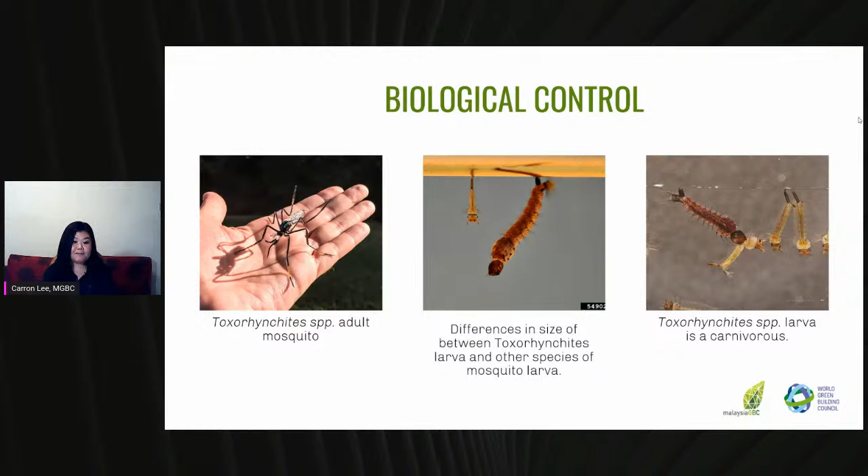I'm not sure how many of you have heard of Toxorhynchites species. This is a giant mosquito which you can hardly see. Normally they appear in the forest, and they are the biggest size among all mosquito species. Picture number 2 shows the differences in size between Toxorhynchites larva and other species of mosquito larva, like Tom and Jerry.

The small larva is what you normally see in stagnant water - those are the normal species of mosquito larva. Whereas on the right is the giant one, definitely because the adult is already a giant mosquito. So that is Toxorhynchites larva, and that's the size of it.

And the third picture - can you see? Toxorhynchites species larva is actually carnivorous. They bite those small larvas. So if the small larvas are Aedes larva, they are actually doing biological control - helping us suppress the population of Aedes. Isn't that good? This is what you call biological control.

I left out one point - even though Toxorhynchites species mosquito is very big, a giant mosquito, the good thing is the adult is not a blood sucker. So you don't have to worry they will suck your blood. They don't feed on blood. What do they feed on? They feed on plant sap. That's the good thing about Toxorhynchites.

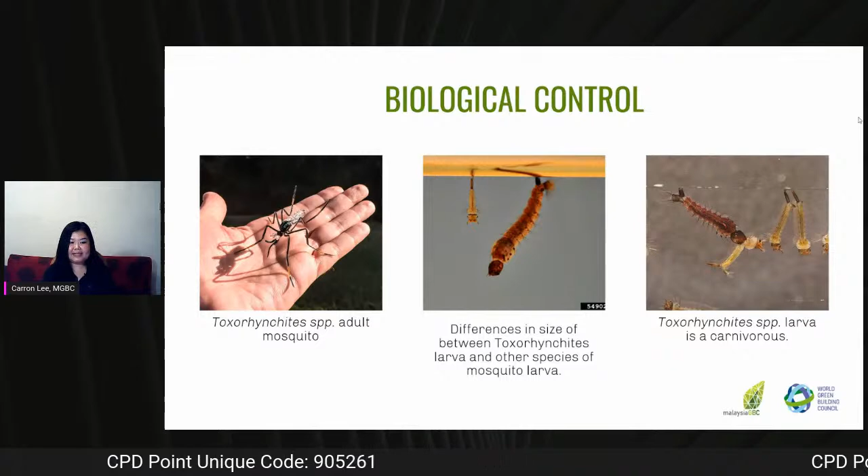From now on, let us focus on physical control through green design. Why is it important? Because the architect is very important. You design the building, and your design doesn't just give a positive impact to the green building environment, but to pest prevention as well. If you understand all the points from a pest perspective, you are helping the environment, helping the world to suppress insect infestation. You do pest prevention by design - you are designing pests out of structures.

Benefits of pest preventive techniques at the design stage. During the design stage, it is always good to bring in an entomologist to be on board so they can run analysis and inform the architect of the perspectives you need to look into. Simple design features can reduce long-term pest control costs in buildings and landscapes. This is definitely true. By the end of this presentation, you'll understand how we can work together to help building owners reduce long-term pest control costs, especially for termites.

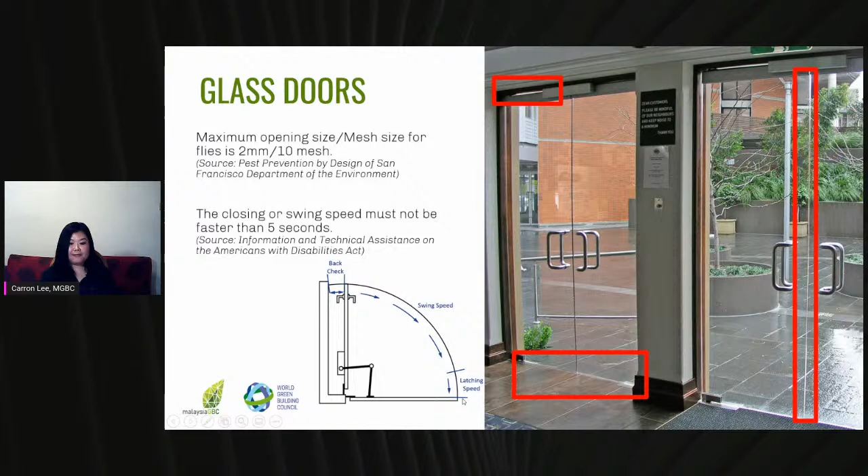Air curtain. If that area has been identified as heavily infested with flies, and you know you cannot afford to allow flies to go in, other than designing the doors, you might increase air curtain specs for heavy traffic—an air curtain at the entrance door.

I'm going to show you this video. I'm not promoting the brand, I just chose it randomly from YouTube, which I think is something I'd like to show with everyone. Please focus on how they repel the flies.

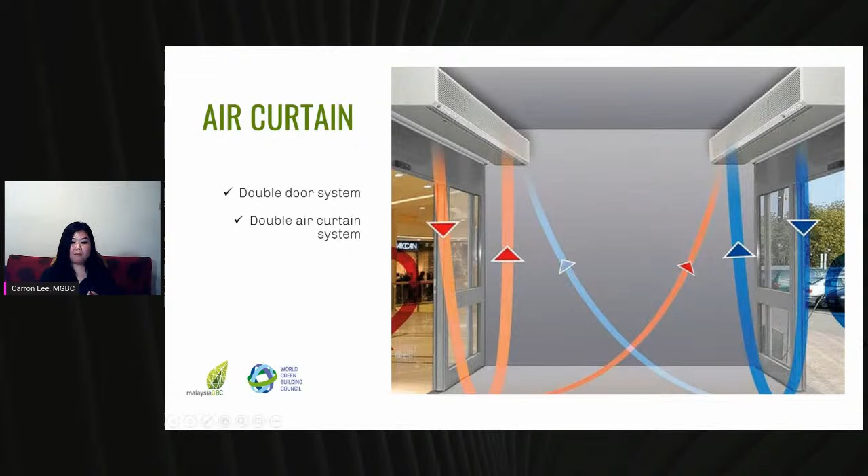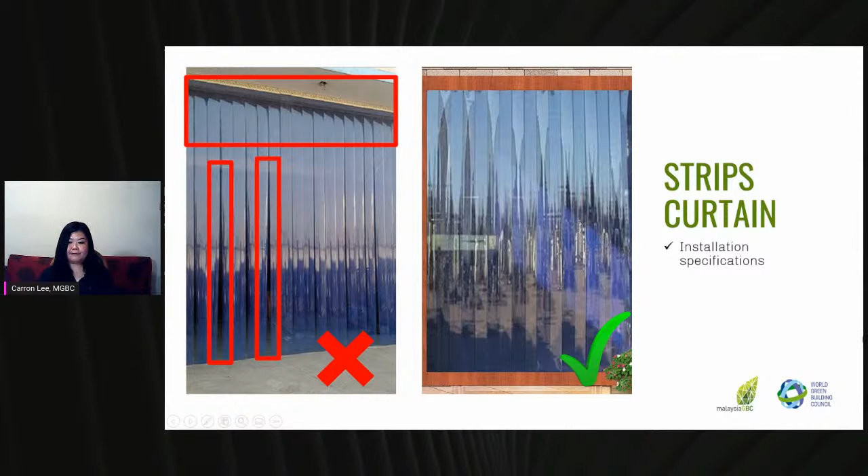Case study. Let me share with you some case study—this is what I experienced. LCCT budget airport, many years ago, everyone went to LCCT budget airport. My experience was that the F&B outlets were all open concept. Maybe it's because it's a budget airport, but they faced a very serious issue, which is fly infestation. Their food had a great smell, which attracted a lot of flies to the F&B outlets.

So I went there to conduct the treatment every day, and I spent weeks there to study the flies' behavior, and I told them you cannot get rid of it. The F&B outlet there is running 24 hours, 7 days a week, and it's open concept - meaning no glass, nothing. I told them you need to install glass panels, a proper entrance door, maybe a glass door, so that we can stop the flies from outside coming into the F&B dining area.

So the client went and installed it. But still, I noticed it's still not good enough, to be honest. Even though they built up the panels and everything already, the flies can still come in. It shows that the infestation there is very serious. But of course, after they put up the glass panel and the glass door, the infestation has cut down.

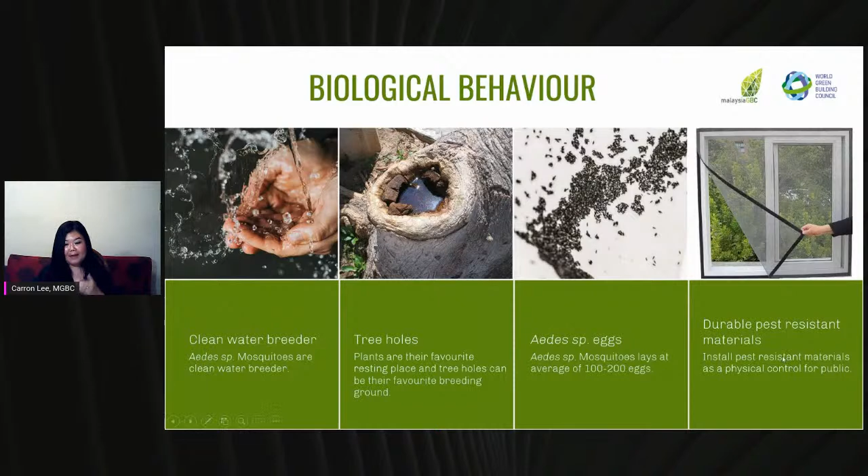What I really try to highlight in the analysis report is that I need a gadget to collect mosquitoes, and from there we identify the type of species of Aedes. If that area is proven to have Aedes, then that is already a trigger - that area is a red zone for dengue outbreak. So from there, you have to come up with the specs, or go for durable, pest-resistant materials.

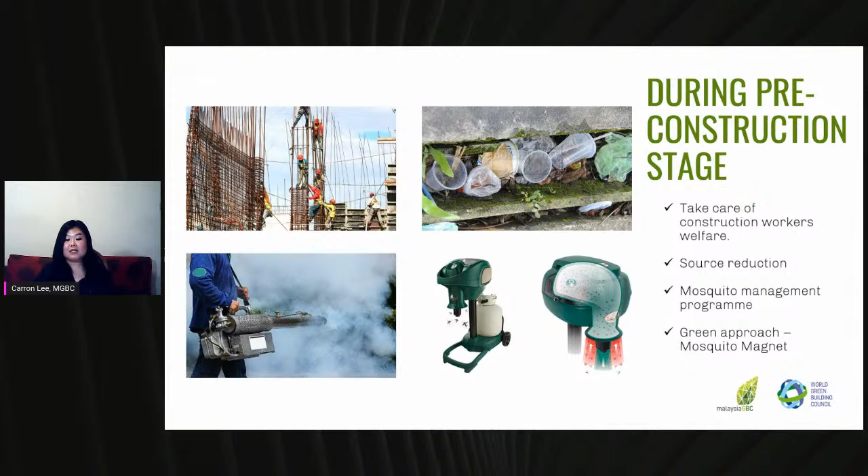During the pre-construction stage, when you talk about mosquitoes, of course you have to take care of the construction workers' welfare, because if one of your workers is infected with dengue, the authority will come after you. So why actually will the construction area become a breeding ground for Aedes? Mainly it's because of this - all these are potential areas for Aedes.

The cleanliness of the site, you have to look into it. And of course, you must have a mosquito management program, which normally you have, and plus, this is the mosquito management.

This is actually a green approach, which does not use chemicals. It mimics humans, releasing CO2, and then all the female mosquitoes, only female mosquitoes suck blood, will go into this gadget and they lock it up. So from here, I will be able to see and identify what type of species you are having at that area.

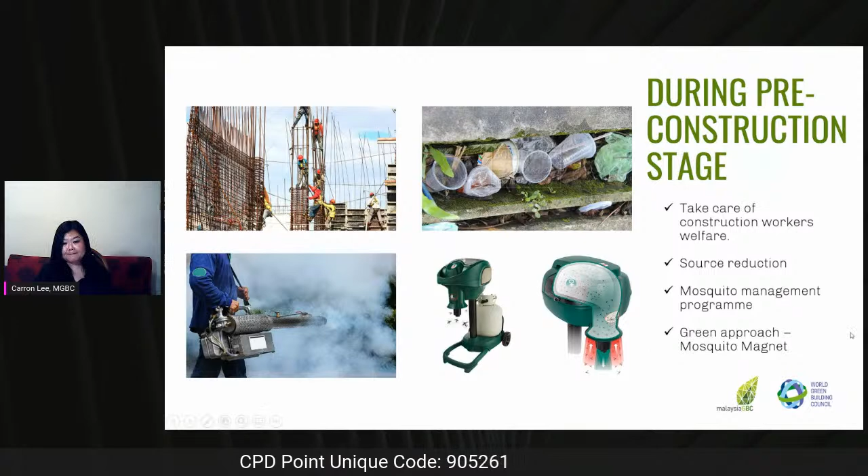If let's say that area is heavily infested with Aedes mosquitoes, what shall you do? Let us look into rain gutters. Each and every pest, each and every insect, there are a lot of points, but I just choose a few in this presentation. So rain gutters is the one where I normally see a lot of mosquito larvae staying.

In Malaysia, if you see, we like to expose the rain gutters without any screen. So that is our Malaysian culture. For what purpose? I'm not sure. Perhaps it's the cost issue of the construction, or perhaps they feel there's no need to put any wire mesh or screen to cover the gutters. But if you want a green approach for mosquitoes, this is very important.

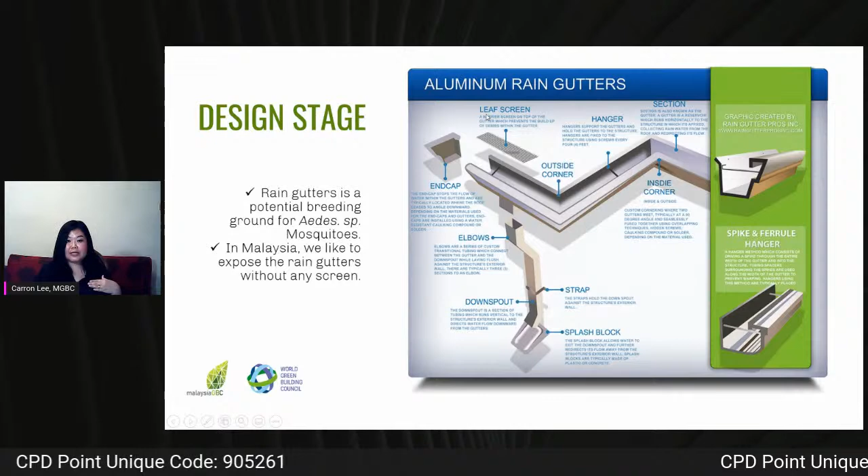We are not looking into leaf screen, I'm looking at mosquito screen. Why is it very important?

This data is extracted from WHO, the latest one. In year 2020, as of 11 July 2020, the total reported cases of dengue is 58,645. Is it very, very high? Absolutely yes. If you compare with COVID-19, everyone is talking about COVID-19 - COVID-19 in Malaysia, just now I checked, is about 10,000 plus.

To us this is a very serious case. But how about dengue? What I want to tell you is dengue actually is very important in Malaysia.

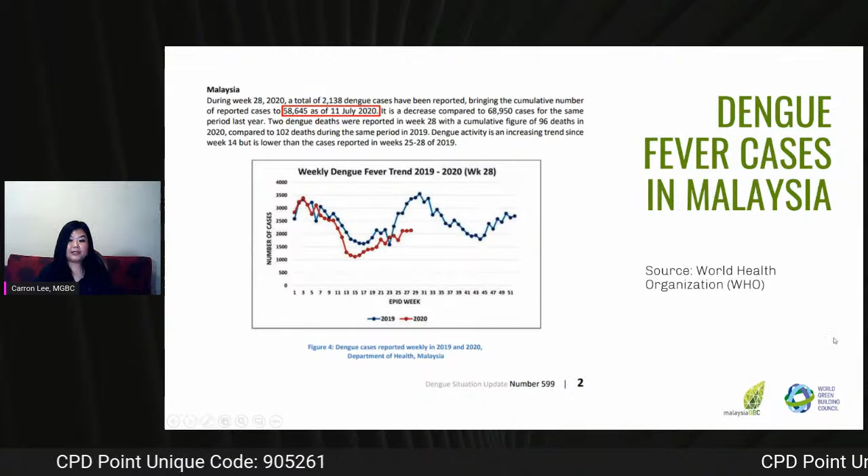Back to the rain gutter. Instead of just exposing the rain gutter, how about we use a rain diverter to divert the rainwater directly to the downspout? Is it workable? Second thing is, if not workable, and you must have a rain gutter, why not put a mosquito screen? The mesh size has to be no more than 1 millimeter.

And this is not just a figure from the sky, it's data from the San Francisco department. If you talk about green approach, it might be new in Malaysia for pest management, but it is not new overseas.

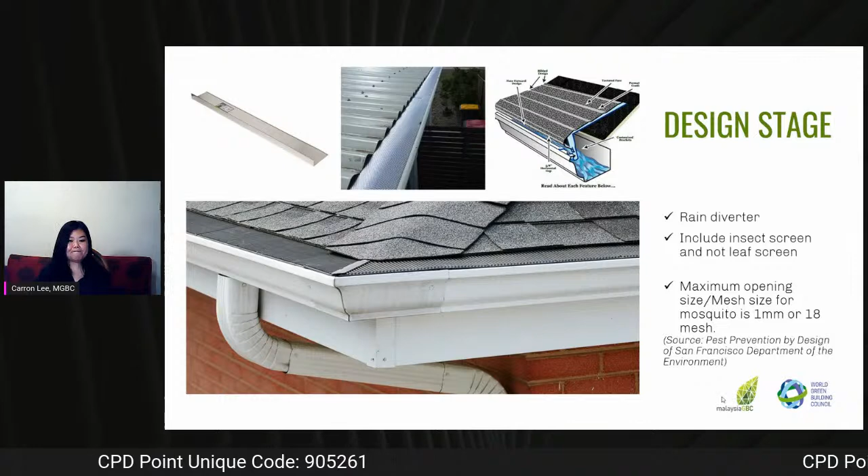Like this one, they are just focusing on leaves, but this design is not ideal if you talk about mosquito management. The mosquito can still fly in, and you have clean water stagnant there, and they can lay eggs, and you have the population again.

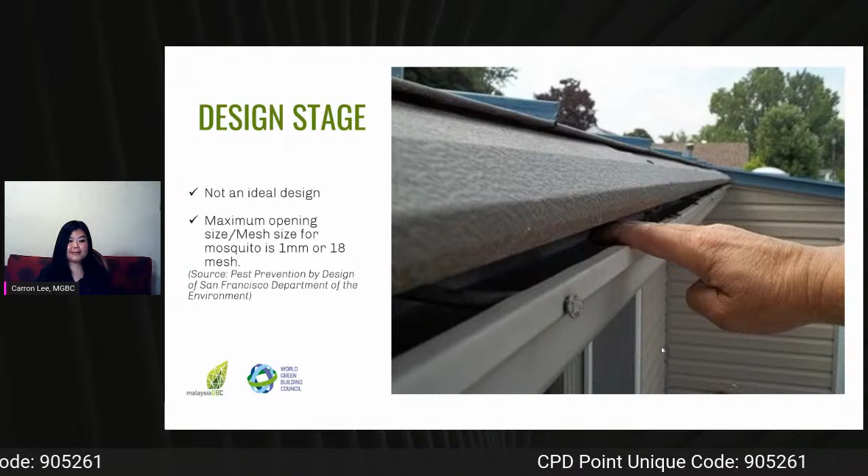When you have this sort of design for rainwater, why waste the rainwater? If you talk about green building, from there, why not move into a rainwater harvesting system as well? So this is a very good approach, but my concern will be the gutter with screen on top - it has to be under mosquito specs.

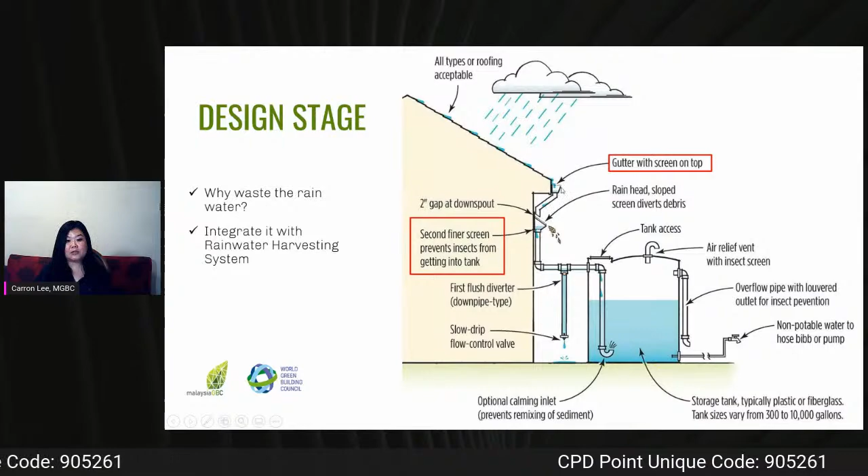Commissioning stage is very important for us to go in and ensure all potholes at the external surrounding are closed, because later I'll show you my story.

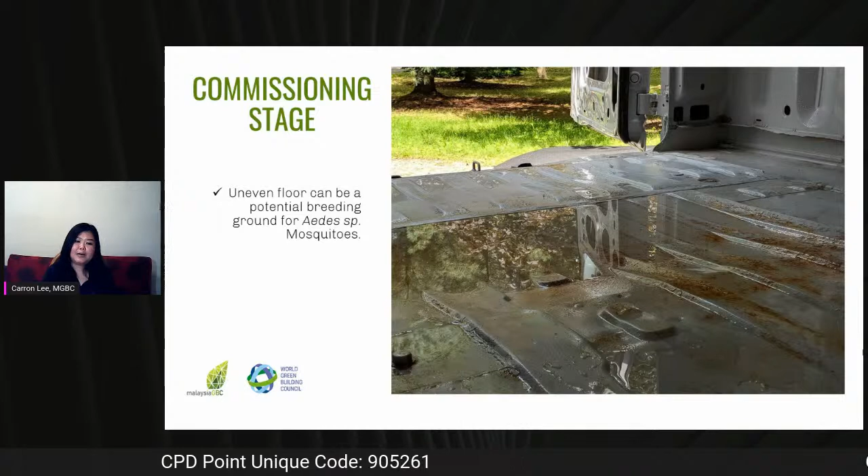Like this, uneven floor also will be my main concern. Every time I go to an area, if there's uneven floor and I can see a pool of water there, it is actually a potential breeding ground for Aedes species.

Let me share with you a case study factory. This one happened many years ago in Petaling Jaya. So they called me in, and I will not forget that round of inspection, because that factory was heavily infested with Aedes mosquitoes.

Why they called us in is because MOH, the authority, went after them, and they confirmed that the larva is mosquito. So it's a hot zone for dengue outbreak.

And this factory actually does not manufacture anything. They just use the factory as a storeroom, a warehouse. It's a very well-known company - I will not tell you what company that is. So they actually store all the sanitary fittings, and even though the warehouse is so big, they don't have enough space.

They even put the sanitary fittings like toilet bowls, sinks, everything at the external perimeter of the building, so that when rain comes, you actually collect water. Just like a toilet bowl, it collects water.

Second thing is, when I walked in, the road was not nicely done. You have a lot of potholes everywhere, and I was very surprised.

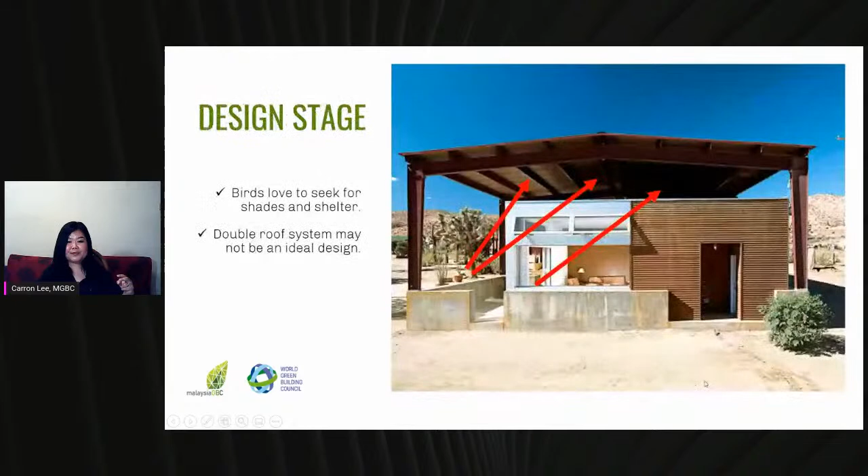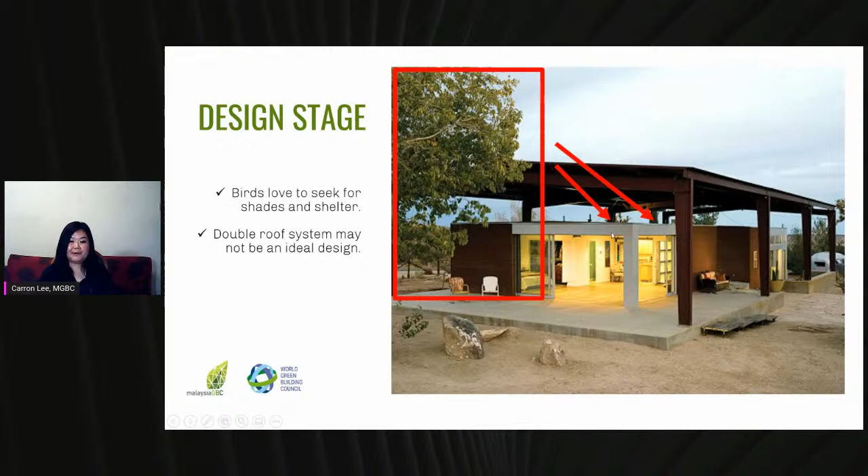Second thing is they will also hang around here. To do an inspection or investigation of birds, you actually have to see the timing. Normally, towards the evening time, when you have a lot of shades, you will know where the hotspot area of their hanging place is. Like this design also, you see, there's a tree here. So the birds can be hanging around here, can be hanging around here. So it's not really an ideal idea to have a double roof system.

This one as well, especially for factory. If, let's say, you build a factory, you must understand what type of factory you are going to build. If, let's say, it's a food factory, there are a lot more things you have to consider. It's not just building a building, because food factories are very strict. You have to comply with their food certification.

A lot of customers do not know how to inform the designer what issues they are facing, but actually the building plays a very vital role in pest management for a food factory, especially in an area which is heavily infested with birds. It is advisable for you to install metal birdstop. The roof of the factory is actually a corrugated design, so it's always good for you to close the gaps. Otherwise, birds like sparrows can actually fly in. And normally, a factory's ceiling is very high, so it's not easy to get things manageable.

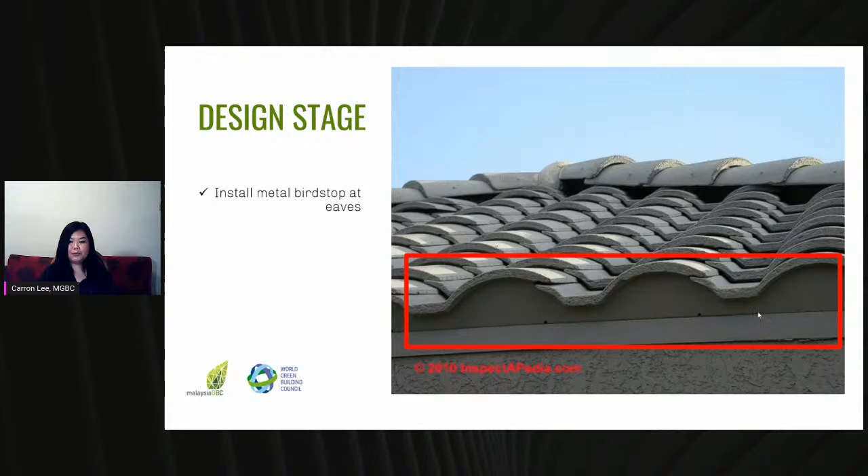Case study of birds. Let me share my case study. Mosque. This client asked me to visit the mosque, and the mosque is very beautiful. So I walk in, and it's very peaceful because it's a holy place. The design of the building is very beautiful. When I look up at the dome, the art is so beautiful. They are facing a birds issue. Why? Because at the entrance of the entire building, there's no door. So it's open 24 hours, because that is what they want. They want the nature. But that area is infested with birds.

And throughout the entire building, they have also installed ultrasonic devices, which repel the birds away. If you want to go in that direction, do not think of buying one or two units to try. You are actually wasting your money. If you want to go for that gadget, the entire building has to be integrated during the construction already. That is what most people are doing, which is very good, I told them. But still, after about a year or two, they say it's not really working, and the birds start to invade the internal area of the mosque.

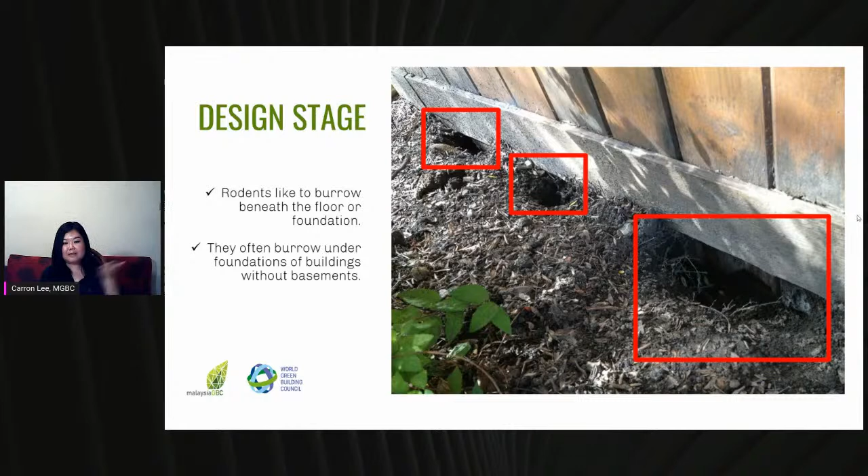And the rats start to go into the building already. And that area is actually very near to their kitchen laboratory, so there is a lot of food. And the rats really burrow like that. Every week I have to spend time counting the burrows. Why do I need to count the burrows? We count the burrows because when the number of burrows keeps decreasing, it means the population starts to reduce.

This is the latest project case study. This is a government building. You see the design of the building. This actually is a slope. It's a landscape. It's a very big landscape, and it's a slope area, and that's why the design of the building is like that. This type of gap, actually the rats can go in.

A big landscape actually can tell you you will be having a very heavy infestation of rats already. Plus, if let's say the design is like this, the rats can go in. And the internal design of that building, the floor, actually they use floorboard. Okay, so the floorboard, that means beneath the floorboard, you have a lot of wiring.

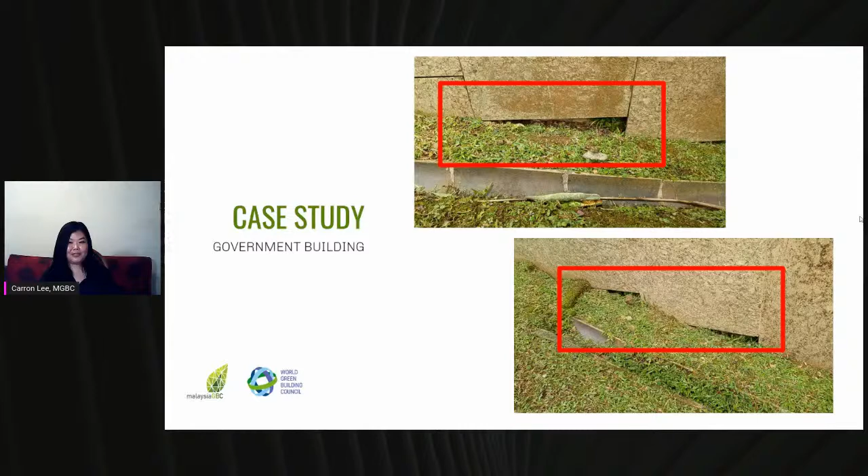So this client is facing a rats infestation issue, and I can tell you the rats actually travel through the wiring system of the building. Okay, quite a very huge building. So what shall you do?

So for rats, it is advisable, if you know that there is a high pressure of rats infestation, to try to construct curtain walls, okay, around and below the foundation. So the material will be concrete. The specification is 2 feet below the surface, 8 inches horizontal L.

That means here, okay, 2 feet minimum. This side to here has to be 2 feet. Here maybe 1 foot. And the thickness of it has to be 4 inches. Why? Because if let's say the rat comes here and burrows, what are you going to do?

The rats will come here and you actually deflect the rats away from invading the internal compound of the building. Without these curtain walls, the rats can just burrow. That is what's going on in Malaysia here. The rats just burrow and they just move in here.

Let's say, just an illustration, okay, this is the floorboard as I mentioned to you earlier. Down here are all the wiring, okay, linked to all the departments of the building. They will follow all this wiring channel, and a very heavy infestation will happen because one mother rat can deliver about 6 to 7 babies per litter. So you just imagine.

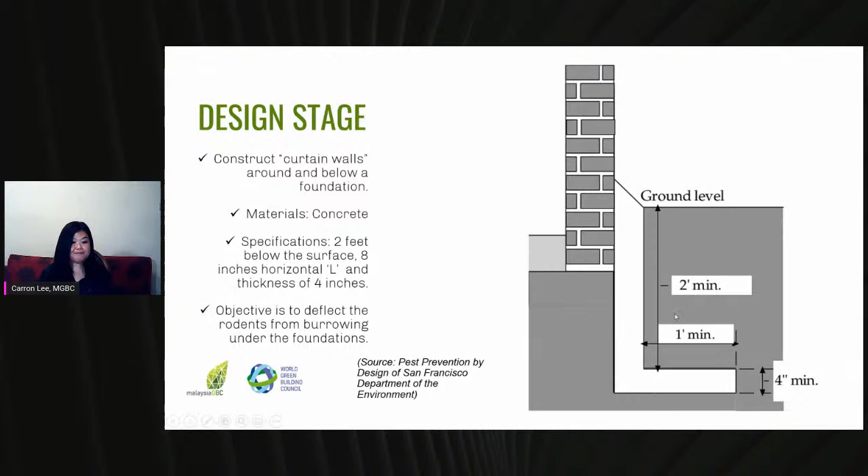Okay, this is also piping. It is very important in order to control or manage the rats infestation. Instead of installing the piping with an open end, I would suggest that the building is installed with flap valves or mesh at the downspout. So that's what you see. And the maximum opening size or mesh size for rodents is a quarter inch. Okay, this is very important.

And this is actually a rain gutter, right? To us this is a rain gutter, but to the rats this is a highway. Okay, no matter how tall your building is, 29 floors, 30 floors, the rats can go from the drainage system on the ground floor straight up to the 29th or 30th floor. It's a highway to them. So it's good that you cover it up with the mesh.

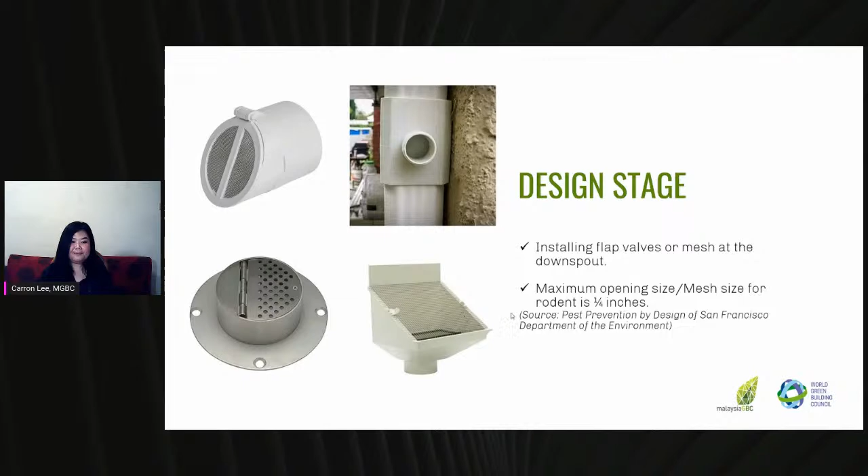Okay, when you talk about rats, there are a lot of case studies. When you talk about rats, I always say it's not about one F&B outlet issue. It's not one building issue. It's actually the entire area. If you want to have a very good rodent management program, you need to get the local council involved. Without their support, we will not be able to suppress the rats infestation in the area. Okay, all commercial buildings will face rat issues. It's just a matter of how heavy the infestation is in that area.

Okay, let's move to termites. I will share with you what are the current treatments available in the market and what is green termite management. Termite soil treatment is nothing new. Every construction, you know you must do soil treatment. So this is how they do soil treatment. They just wet the entire area and spray termiticide at the construction place.

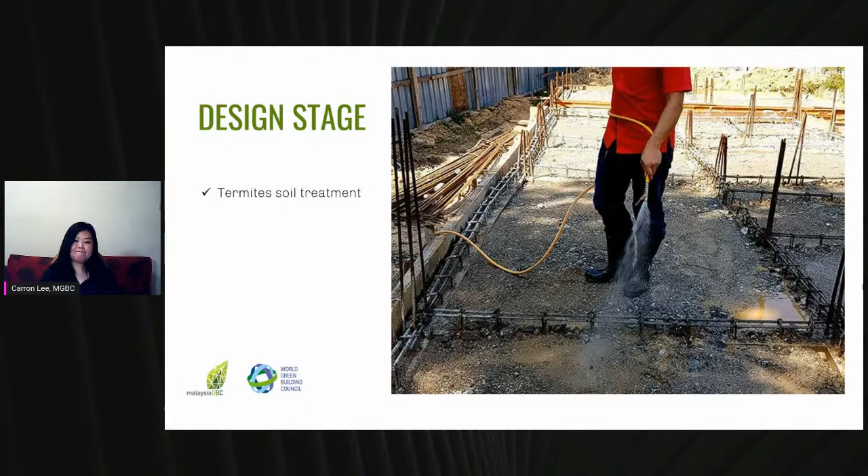But when you go for soil treatment, you also must understand the type of termiticide. Normally at the consulting group, you don't have to know what type of termiticide your contractor or pest control provider is using. But it is always good to go the proper way. What I'm going to share with you is scientific research done by a professor, which no one in the market does. You want soil treatment, people just quote you soil treatment. How much is it? They will use the chemical according to your budget.

But if you talk about termiticides, there are a lot of big manufacturers out there. Every year they spend a lot of money to do research and come up with new technology, and still people will go for the cheapest one. Understand, construction cost is a very critical issue. The cheaper the better. But what is the impact of not knowing the real scenario of soil treatment?

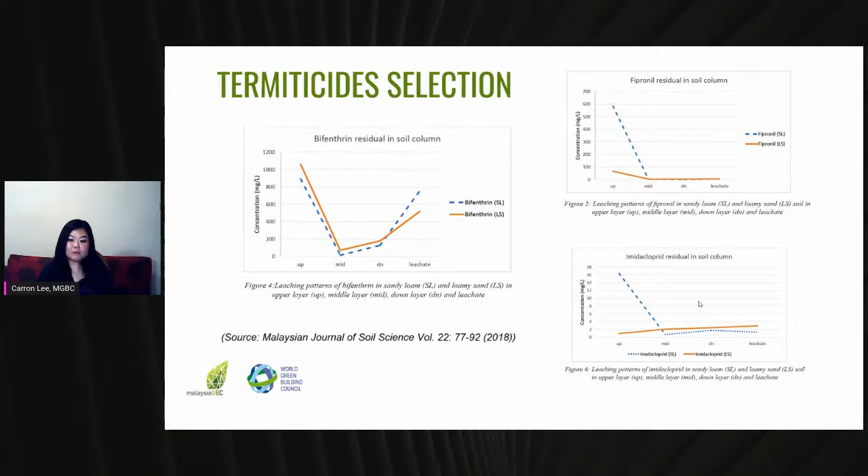Other than chemical, if you want to go for green termite management, overseas they're actually using the wire mesh technique. That means no chemical at all. They put aside the soil treatment method. They just target all the structures which are potentially penetrated by the termites. From there, they apply the wire mesh technique. I'll show you later. But the size of the mesh is very, very important. Maximum opening size of the mesh for termites is 0.6 millimeter only, or 28 mesh.

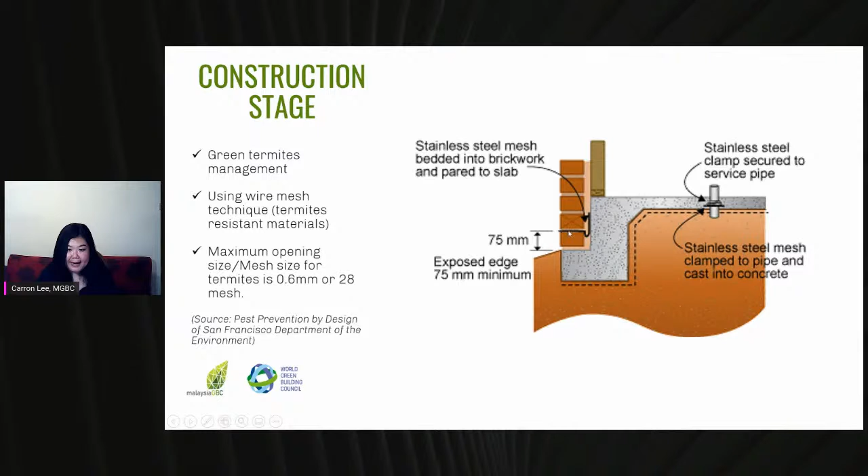During the construction stage, you can see all the piping areas - these are the hotspot areas which termites will penetrate. So you use the wire mesh, you secure it here before you pour your slab. Another one is when you have this type of design, this area is also potential for termites to penetrate. So you also use the stainless steel mesh bedded into brickwork and pared to the slab before you pour all this.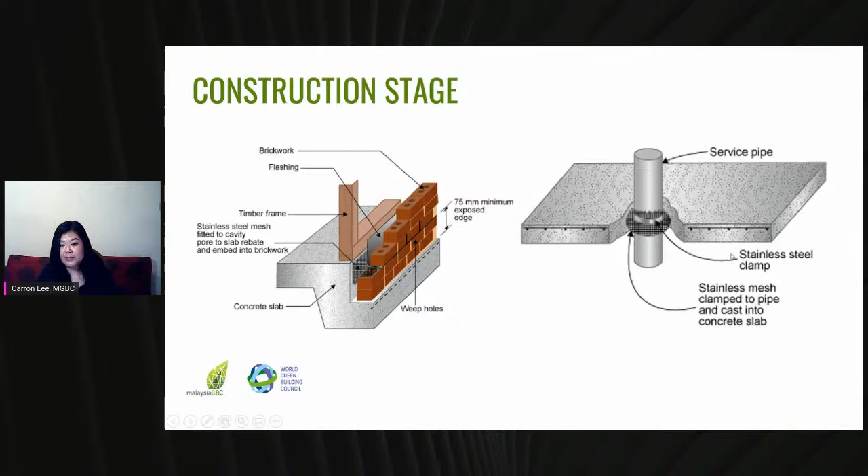Let us see here - this is how you're supposed to lay your wire mesh. This is nothing new in overseas countries like Australia and US, they've been using it many times. They also give points for the green building approach because there's no chemical being used. So this one also, you see the pipe, that's how you put the wire mesh here.

Let me show you this video - this is from the US. I want you to focus on the size of the mesh. This is not just a piece of plastic bag, this is nothing bigger than 0.6 millimeter. Let's enjoy.

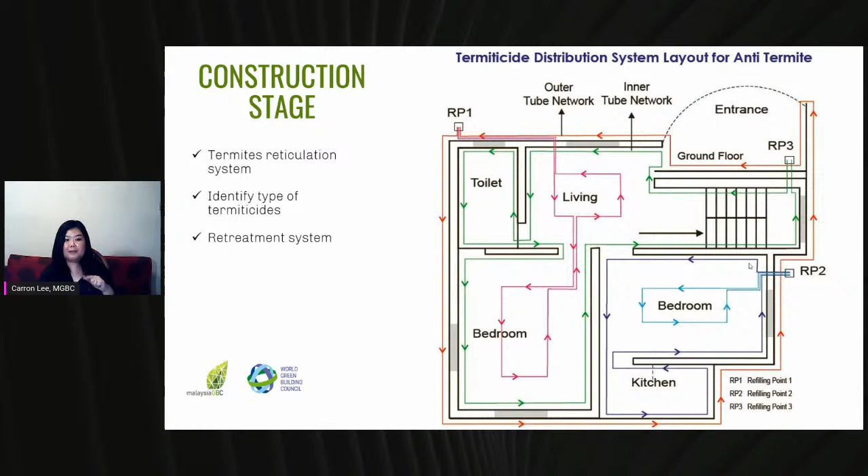The good thing about this system is after 2 years, when the building is up, you can actually open up RP1, RP2, RP3, and pour and reapply. That's why it's written here, retreatment system - reapply, pour the termiticide, and treat the entire area again. But this is a chemical approach.

So this is RP1, the RP I mentioned earlier - this is the station, this is the pipe. This is how they run the entire thing at the structure of the building, and they cover it.

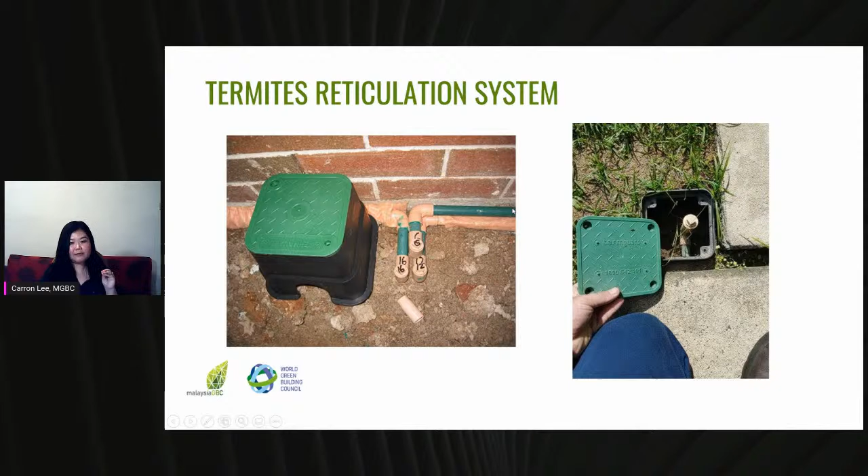Prevention better than cure - when it comes to termites, everyone asks me what is the best method to prevent termite infestation. What do you really mean by prevention better than cure? I will normally ask them what type of property they are staying in now - are you staying in a semi-D or bungalow? If you're staying in a semi-D or bungalow, it's very easy because the entire building structure is controlled by you. You can actually plant some termite monitoring stations around the area, and then you need to monitor or inspect periodically.

If that station is hit with active termites, you just have to change it or replenish it with termite bait, and that's where they will bring the bait and eliminate the entire colony of the nest. Second, if you're staying in a terrace house or condominium, and you really want prevention better than cure, I would say during the construction stage is the best way of doing it.

Because, you see, a terrace house is a linking house. So what can you do? You plant a station only at the front and back - maybe at the back it's just a back lane, you plant at the front, your car porch. But the termites might come from the ceiling - your neighbor's infestation can link and infest your property. So if you stay at a terrace house, how do you prevent it?

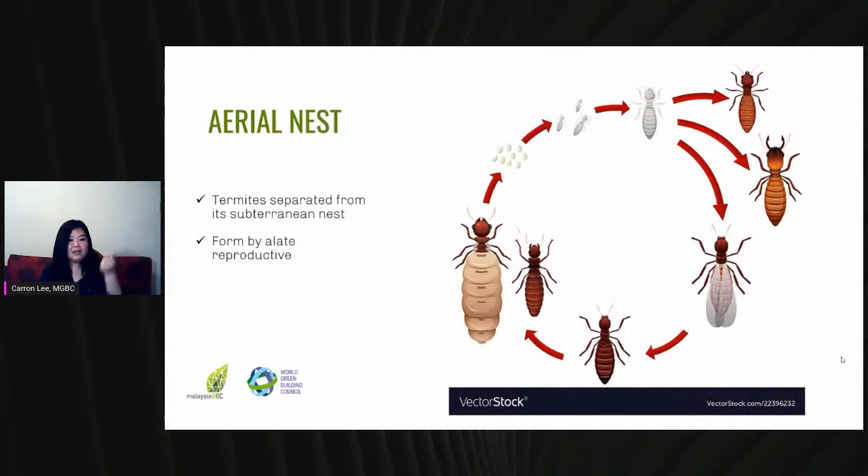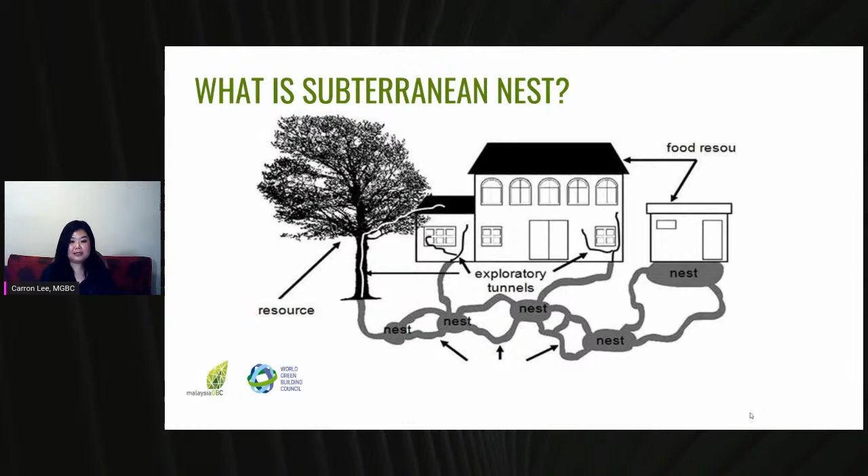When you talk about subterranean nests - aerial nests are separated from subterranean nests. So what is a subterranean nest? There are two categories of termites here. One category you can actually see their nest - that is called a mound nest. The second category is what everyone is worried about: the nest is under the ground, which you can't see. This is caused by another category of termites. I won't talk more about the biology, but during construction, you are targeting this type of nest. In Peninsular Malaysia, the popular species is Coptotermes gestroi, whose nest is under the ground, and they attack our property.

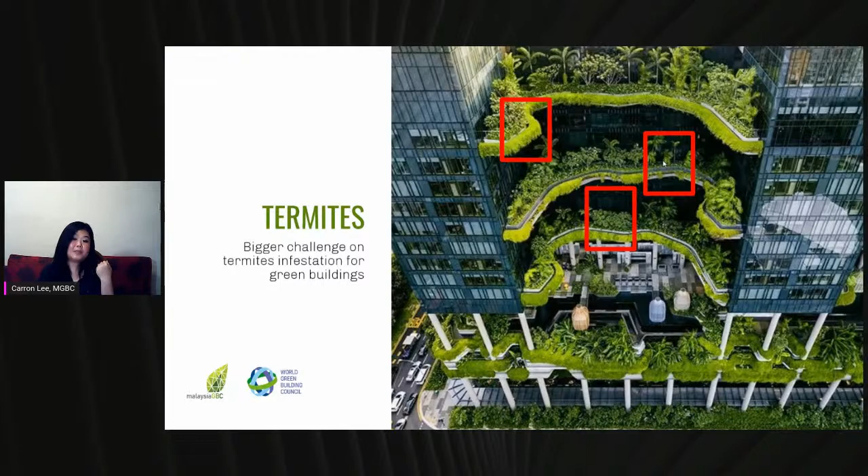When dealing with subterranean nests, you apply chemical treatment or green wire mesh at the foundation area. But once the building is up, you can have a new nest form at any level - once you see the alates, a new aerial nest can form here or another one there. So this is the challenge of termite infestation. But when you see a swarm of alates, normally only 1% will be successful in forming a new nest.

So take pest management seriously, because pests can actually cause property damage. It's true - for example with termites, if you don't do it correctly during the construction stage, you may feel there's an additional budget to allocate for this. But if you think long run, the building owner has to consider it can cause real damage to the property. Public health management matters too, because every pest carries pathogens - microorganisms that can attack our health. Take dengue fever for example - a dengue outbreak is actually everyone's responsibility, not just the task of a pest control operator. The design of the building will help a lot in eliminating potential breeding grounds for mosquitoes, like the rain gutters I mentioned.

So how do you convince the building owner? Generate data analysis. Again, it depends on what type of building you are going to build. If you're helping a homeowner build their own house, they will look into this matter. If you are building a hospital or a school, they will also look into this matter. But how can an architect convince them to look into this matter? By generating data analysis - everything has to be backed by data.

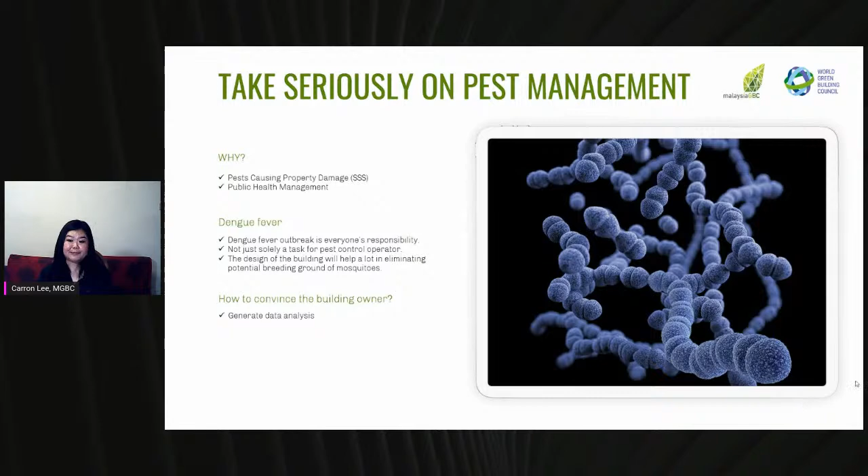So if you can show it to them, this is what is going on in this area. Let's think about it for a greener building, for pest management.

Why dengue? How is dengue transmitted? Because mosquito is the vector. They carry the virus, the dengue fever virus, and the host is mammals, not just human, it's mammals. So uninfected Aedes aegypti...

They bite one dengue infected person here, then they carry the virus, and then they infect mosquitoes and transmit dengue virus to other humans. That's why each time you have a case of a dengue patient, they have to quarantine them, just like coronavirus.

So what I want to pass to you is, it's just like coronavirus. Coronavirus can be a pandemic outbreak. Dengue, Aedes mosquito can give us the same outbreak as well. It's just that the difference with COVID-19 is the method of transmission of the virus is different.

We are the vector, we are the host. In dengue, the vector is the mosquito, the host is actually mammals. So the virus is inside their body and transmits. We need a mosquito to pass the virus from one body to another body.

If the population of Aedes mosquito is not suppressed, one female mosquito can lay about 200 eggs. So imagine half of it is female and male, and the population can grow again. So it is really, really not easy to handle, and this is a worldwide issue.

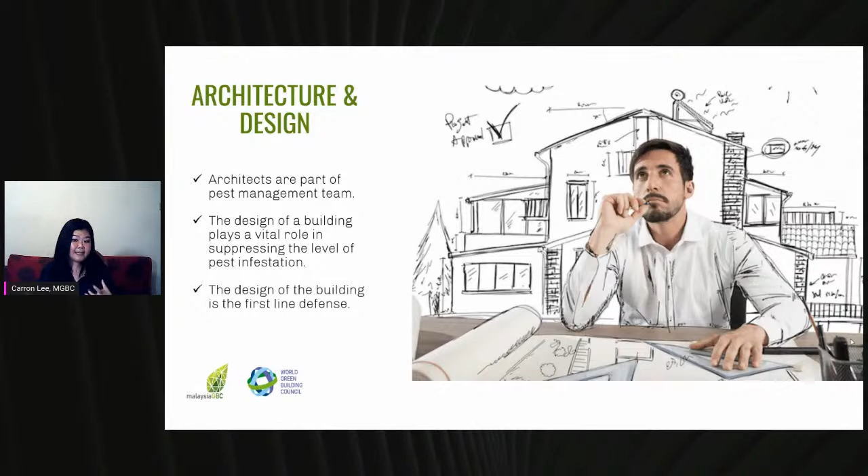Second line defense is left to the pest control operator - how are they going to manage the pest? Third line defense, you need to increase a lot of inspection and auditing to ensure the system runs accordingly.

So with that, I think I have finished my presentation. We are going to move to the Q&A session.